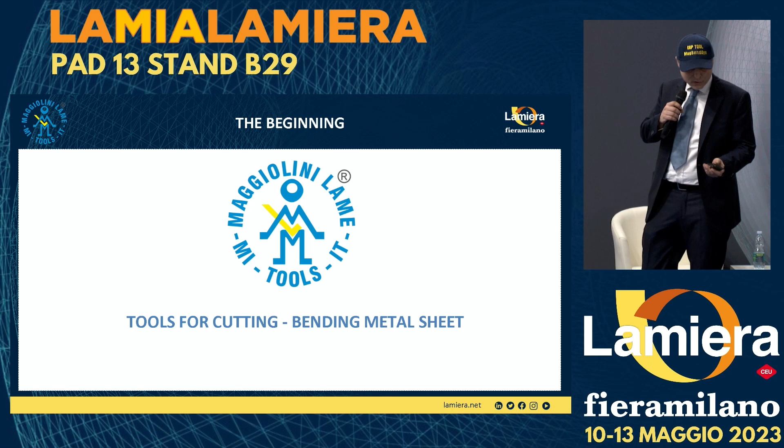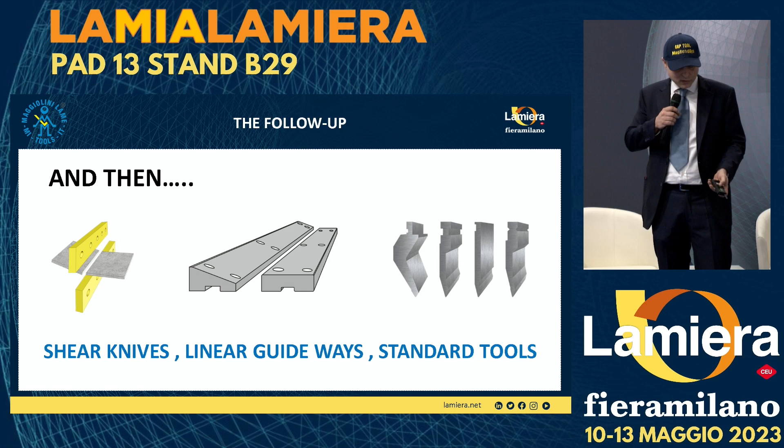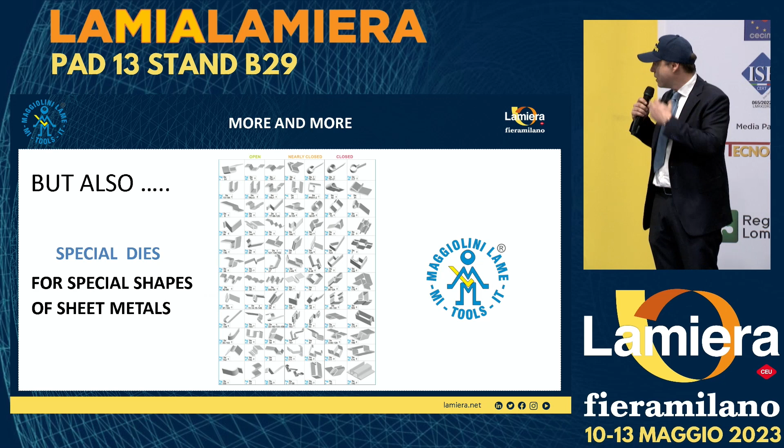Maggiolini Lame produces tools for cutting and bending metal sheets. Our main products are shear knives, linear guides with standard tools, and of course special tools. Here in this page you can see a lot of profiles that, in 70 years of experience, we have resumed as the most common profiles requested by customers during these years. For all these profiles we already have one or more solutions, differently according to the needs of the customers.

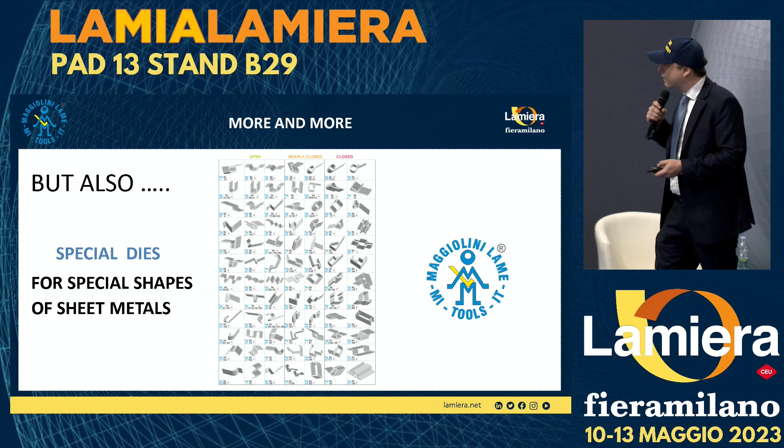By now we are here just to present 3 new products that we have patented. So Maggiolini Lame is 70 years old, and we are going to present all the special press brake tools, exclusive products made by Maggiolini Lame.

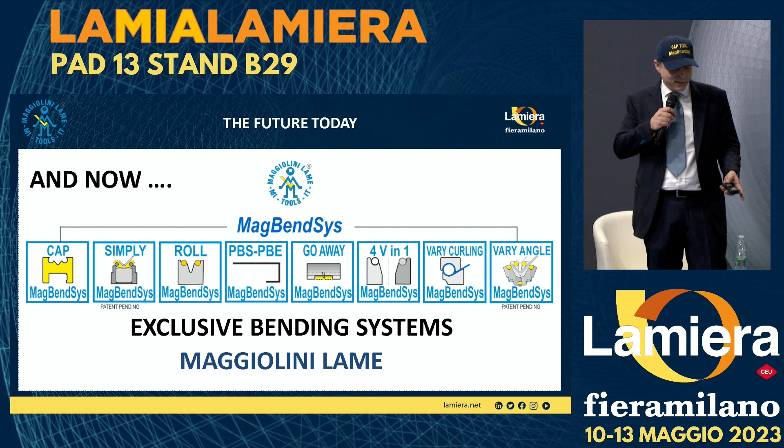In this series we have named the bending line MagBendSys. We included all these exclusive products we realized, for example the first die we patented at the end of the 70s, PBS PBE. And the 3 new products I'm going to present now are the CAP Tools — the reason I have the cap is that it's the perfect gadget to describe this product.

Then there's the Simply Bend Tool, which is the main product we are presenting. And then the new one is the vari-angle MagBendSys, a special matrix that can manage the opening and also the angle opening with millimetrical regulation.

So let's start to see our 3 new products we are presenting at this show. You can see them in our booth at Pad 13, stand B29. The first one is the Simply Bend Tool, then the vari-angle, and the cap.

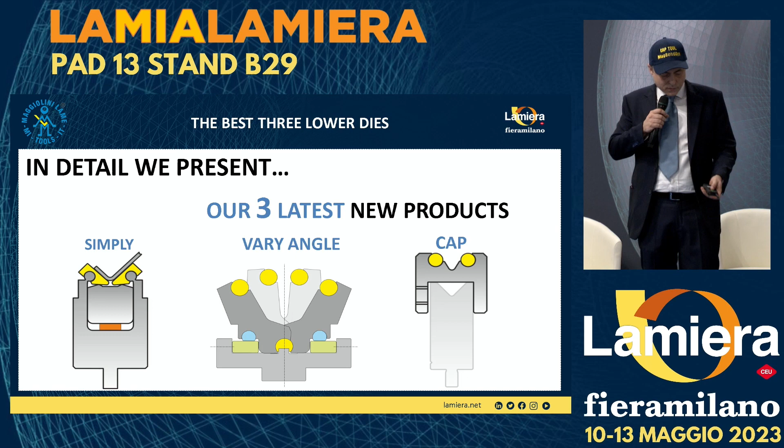Let's start with Simply. That is the first bending tool that can bend up to 30 degrees angle, all thicknesses, without marking, reducing the friction, not stretching the holes close to the bending line, not damaging oblongs close to the bending line.

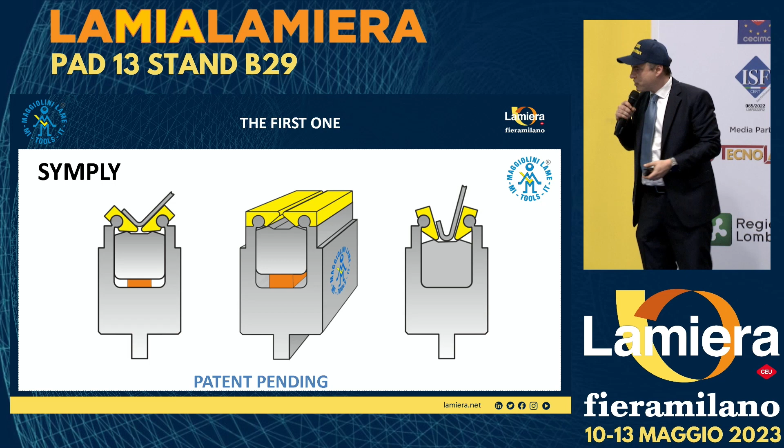Getting to 30 degrees is a very good thing, and it's the first die that can get that angle. This die is completely made by electro-erosion, and with this technology we could make the special profile that keeps the wings tilting — something that can only be done with electro-erosion, no other way, no grinding or milling. That's why we could make this tool and patent it.

The body is made in high-resistance steel, and the wings are totally hardened like shear knives, to get the best resistance and to reduce the friction.

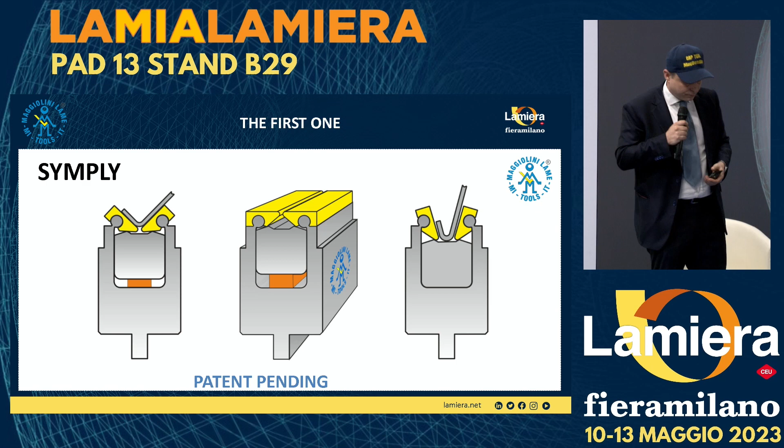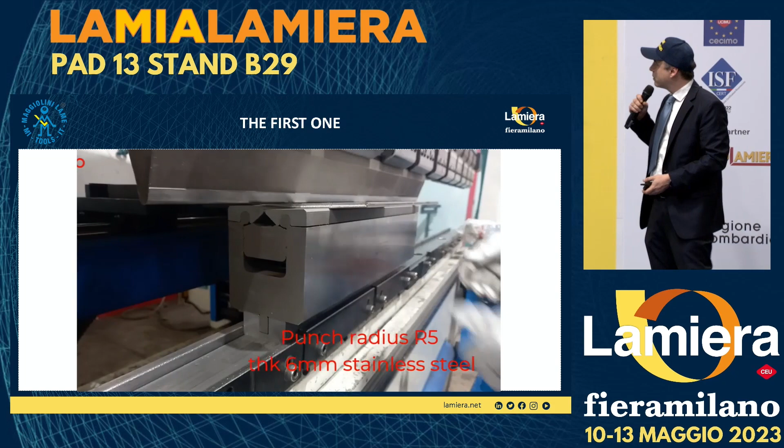So let's see a little movie about one example. Can you play the video? Okay, here you can see one application by a customer. He had to bend 6mm stainless steel without stretching holes and oblongs. You can see now the bending of 90 degrees.

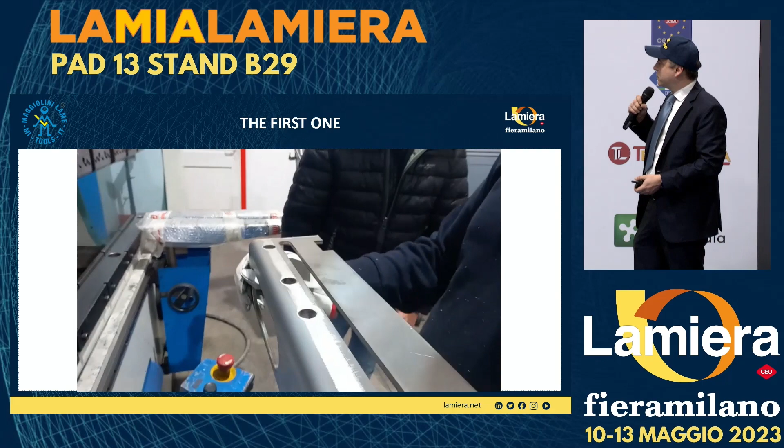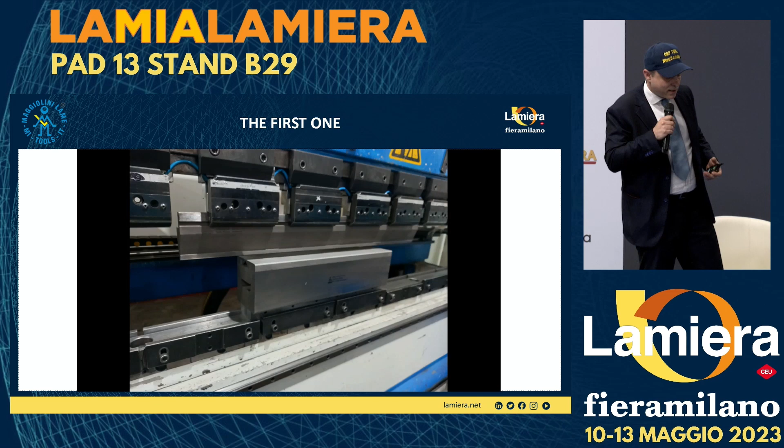The customer was so happy to get the bend without any scratching, and all the holes and the oblong are completely bent. The customer could save a lot of money because earlier he had to make the oblong smaller and then mill it, which was very costly with one more elaboration. With this die, he could save it.

This profile can also be seen at our booth, so you can see with your eyes the result of this bend.

The second and newest product we are presenting at this show is the Vary Angle. This matrix has a variable V-opening and angle with a millimetrical system. With a screw, you can manage millimeter by millimeter the V-opening, and so also the angle.

You manage the V-opening with a screw, then place some spacers under the wings. The blue part you can see is the angle compensator, which can manage every kind of angle on this matrix.

One of the good things about this matrix is its compact size. Compared to the same type of matrix now in the market, this one is much smaller and taller. That's an advantage because you can make a much higher counterbend, and it's much easier to move and manage for the users.

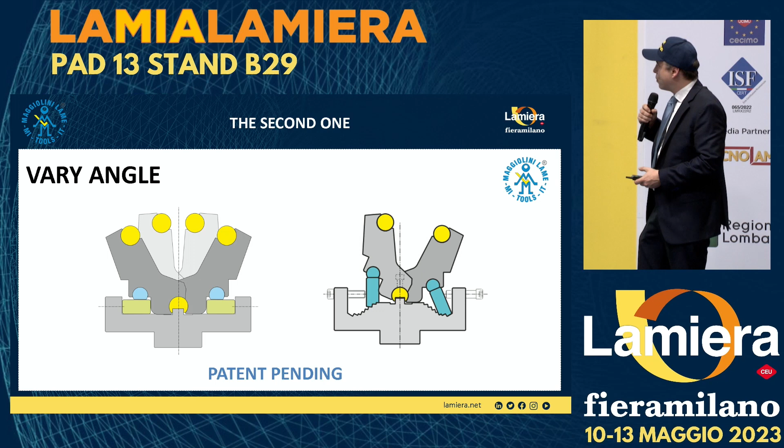This tool can be seen at our booth, hall 13, stand B29.

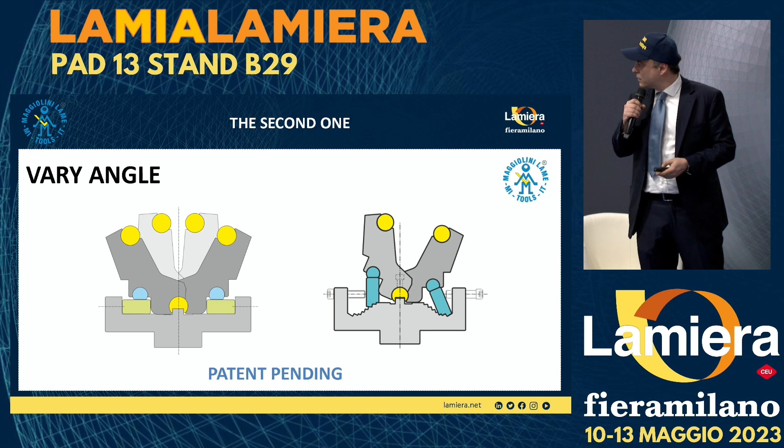The third tool I have in mind is this adapter. This adapter is used exactly as a cap, as you can see. You can later transform standard tools, single V matrix, into rolled dies.

Rolled dies are very well-known matrices. They are needed to avoid marking the metal sheets, to avoid stretching the holes, and they reduce friction. Every stroke of the press brake, the roll spins, reducing friction.

The advantage of using the cap is that these adapters are much cheaper than classic old roll dies.

The sides of the roll are made by electro-erosion, completely closed, so the rolls can be extracted or inserted just from the side, not up and down like the classical ones made by grinding. This is a very good advantage because sometimes the rolls would pull out from the side, which was a problem for the users. Now it's no longer possible.

They are also very small and can be adapted to every kind of single matrix, independently from the kind of base. So Amada, Trumpf, Beyeler - it doesn't matter, because the caps stay up. The important thing is just the thickness of the metal sheet and the matrix.

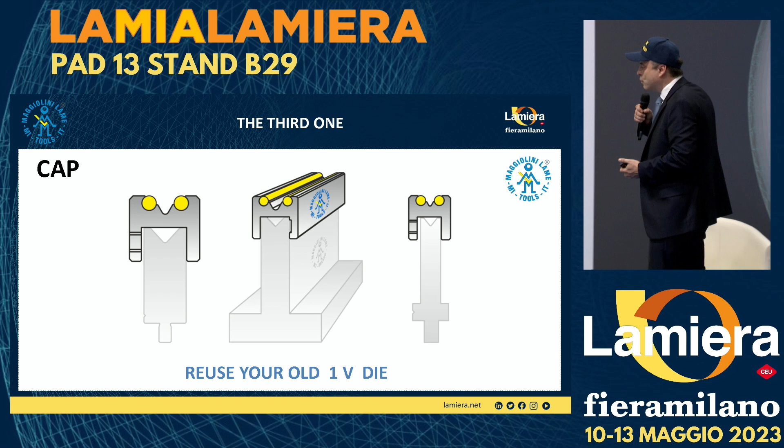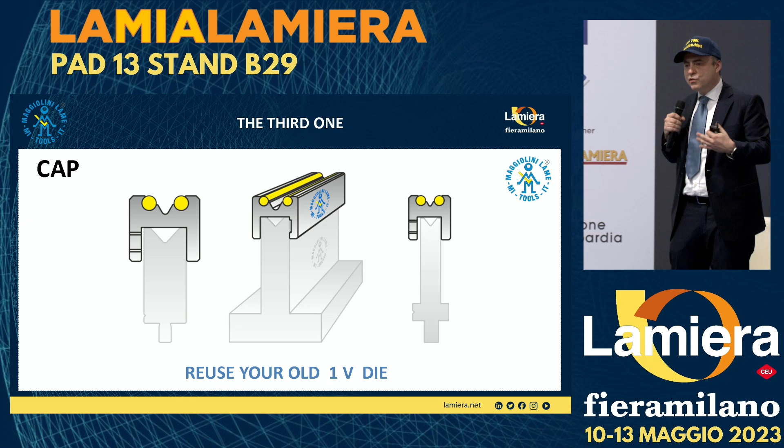Another good thing is that it can be used with old single V dies that users already have in their workshop and no longer use because they are damaged. So with the cap, you can reuse these tools - in a green economy of recycling, it's a very good thing.

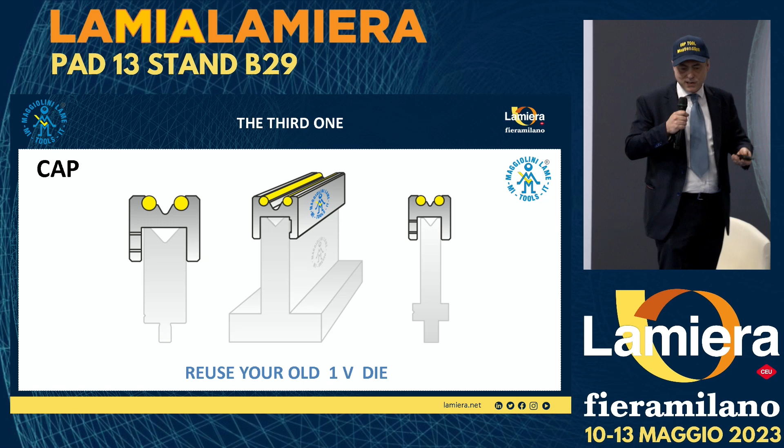These tools can be seen and also tried at our booth, because we have a press brake and we can test all the bends. So you can see already folded metal sheets, or just watch it being made right now at the booth.

To see all our tools, you can come to our hall 13, stand B29, to test it and to see all the profiles, all the advantages, and to see that we leave no marks when bending the metal sheets with this tool. We continue all the demonstrations at our booth - we can use all the tools there.

So if you have any questions or want to see with your own eyes the advantages of this matrix, you can come to our booth to test it.